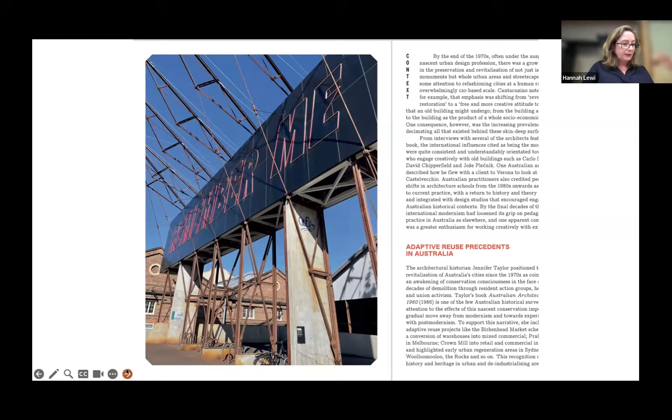And then from our discussions and interviews with the architects, we highlighted quite a lot of common ground in terms of their influences and their design strategies. There was quite a lot of consistency, some debate, but particularly around those practices' own influences, and particularly international influences.

And we asked them all the same questions: who did you look at?

Sorry - probably my son saying, 'What's for dinner?'

They all cite people like Carlo Scarpa, David Chipperfield, Lacaton & Vassal. It's interesting that there's this stable of people we all know about, and that they are having influence and impact in Australia.

Led by our interview data, we grouped our discussion of their current design approaches around challenges such as exploring the fit between form and function as they change function, and how practices go about researching and analysing the historical context they're engaging in, which was a really interesting discussion. NMBW, for example, engage in deep research about the buildings and context they're going to operate within.

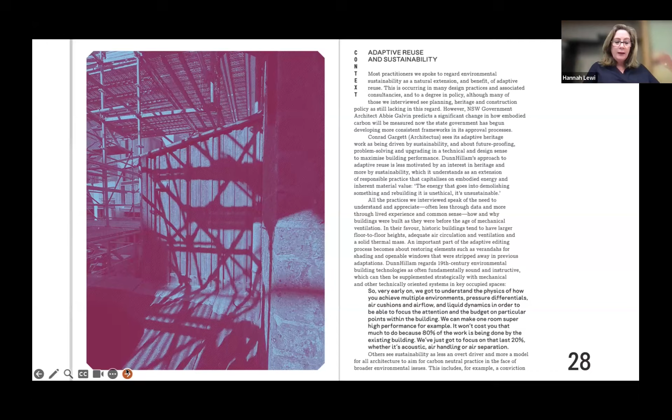How am I going for time? Okay, I'm good, yeah.

So we unpack those things, then shift gear for the second essay. Professor Rob Crawford, a colleague in the faculty, we were very keen to have involved — we'd actually been involved in a failed Australian Research Council bid together.

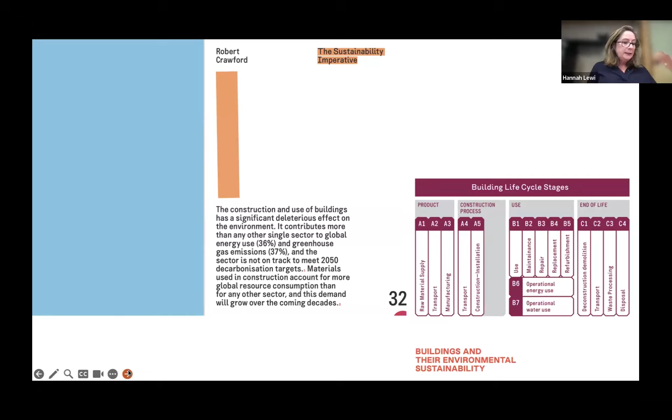We wanted Rob to outline the sustainability imperatives for adaptive reuse and the practical considerations in maximising environmental and embodied energy gains, in a way that's very accessible for students and practitioners — almost as a demonstration for bargaining with your client or stakeholder about the benefits of doing things this way.

He puts together a persuasive set of tools for calculating and demonstrating to stakeholders the environmental value of adaptive reuse. It's complex to calculate exactly at an individual level, but he sets out principles underpinning this presumption, backed by a growing body of research showing there's no sustainable route for the construction sector to reach net zero emissions without drastically curbing new building on greenfield sites, reusing a much greater quantity of materials, and recalibrating reliance on others including concrete, which currently accounts for about 8% of global CO2 emissions.

Many other great books are coming out. One I often refer to is Pedro Gadanho's book, Climax Change, from 2022, which issues a provocative challenge to the architecture profession to lead a new paradigm shift as great as the turn to modernism in the first half of the 20th century.

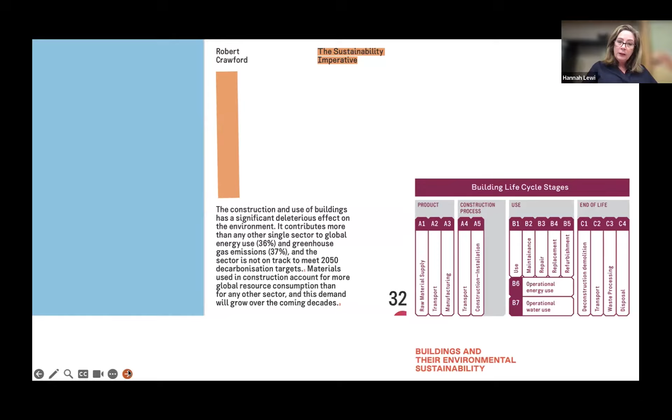I'll whiz through. Sorry, these are just a bit random shots from the book of Rob's essay.

Then we move to the third essay, and I'm not going to talk about this now, but this is around adaptive reuse, particularly in heritage policy, and it unpicks some tensions between conservation and heritage policy in relation to architectural practice of adaptive reuse. But Cameron will talk around some of this next.

The fourth essay, Adapting to New Ways of Working and Living, examines how - and this is already a little bit out of date because we were writing it during the COVID pandemic - these big shifts in the way people are working and living impact decisions around possible adaptive reuse scenarios, such as declining office demands in our cities in Australia as elsewhere in the world.

But it still seems like a relevant conversation. You know, working from home seems to have stuck since COVID. So we were interested in looking at examples, particularly where workplaces have been turned into housing, and the tensions around that.

Some fairly recent examples - there's 180 Water Street in New York from 2017 that's often put forward as a case study in this.

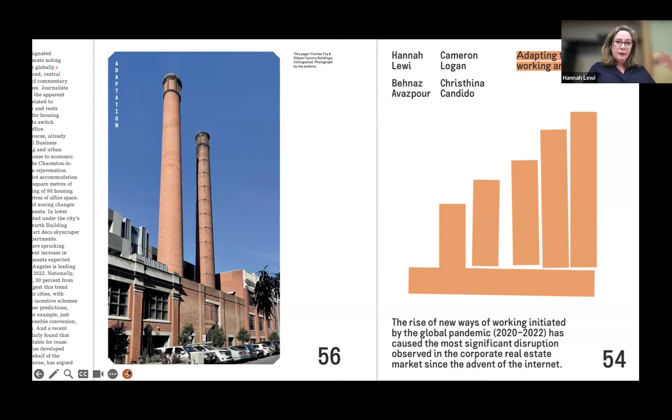And Australian work, we include something like Fender Katsalidis' Alba assisted living apartments, converting office buildings into retirement living in South Melbourne.

We briefly look at issues of how do you calculate the economic value of existing historic building stock and precincts, and the knock-on or proximity effects of this retention of value to neighbouring precincts, including the byproduct of urban gentrification. So a set of wicked problems within that.

Then just briefly, we go into case studies. We've got 23 or so case studies, fairly recent, not all that recent, mostly award-winning. We wanted to get a range of different practices and different types of buildings, and we grouped them into various types in these case study sections.

Those types we group into education, making the civic and cultural realm, urban living and working, interiority projects that are mainly interiors, and then landscapes and infrastructure projects. No individual houses, as we felt that's another discussion.

At the head of each group of case studies, we put forward another short essay where, I guess, Cameron and I, from our historical bent, try to tell the story of this prior to the last 10 years, to start building up towards a different way of talking about the history of Australian architecture through adaptive reuse projects from the 70s, 80s, 90s, and so on.

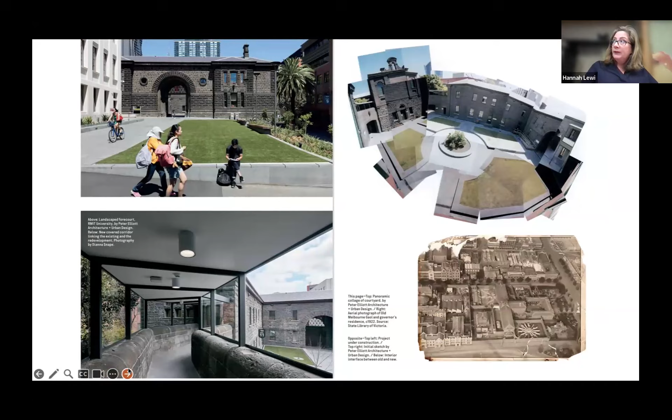I'm going to hand over in a minute, so I'll flash through the case studies but not really say anything about them. These are all education buildings - Peter Elliott's work and NMBW's work at RMIT.

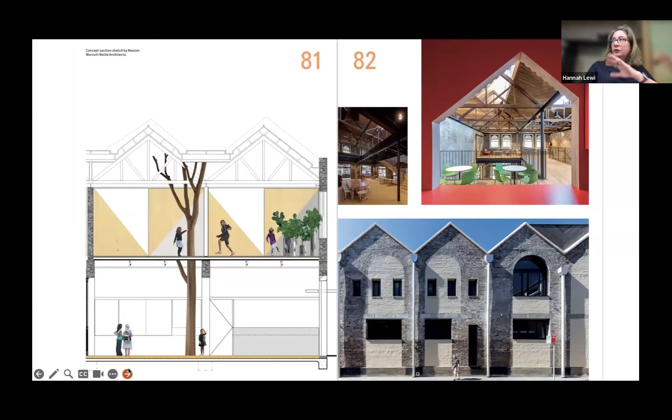Then buildings for community making and cultural sites, of which there's a lot of significant projects from the 1970s and 1980s - major museums, power station adaptations. There's a lot of seminal Australian work in this category.

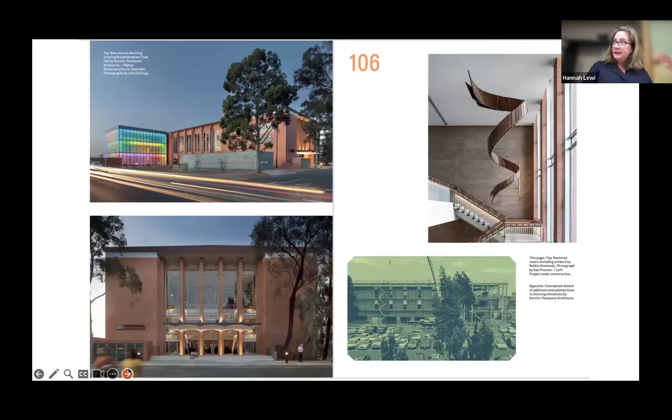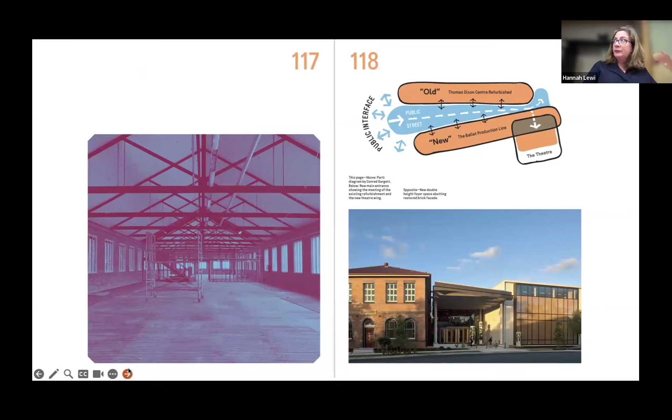So fairly recent ones - Broadmeadows Town Hall. Then some major projects in Sydney by TZG, again really leading practice over many years in this space. In Brisbane, the Brisbane Dance Centre from a shoe factory.

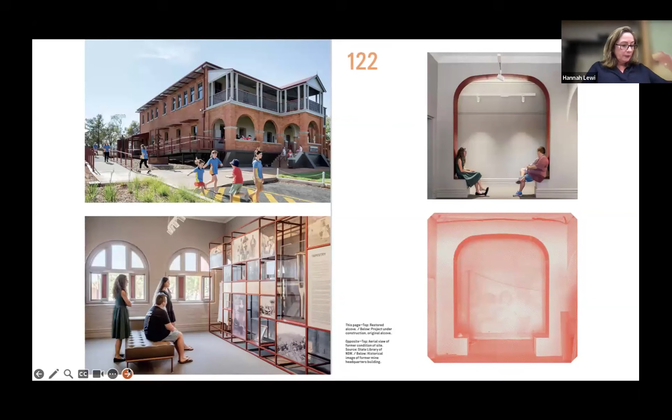And then trying to get some regional work in this, the Great Cobar Museum by Dunn & Hillam.

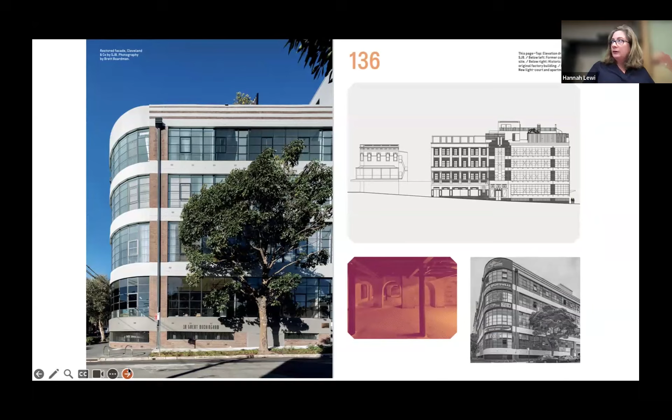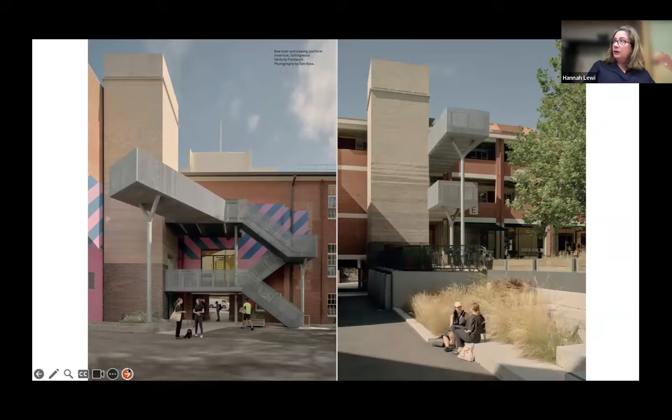I'm just going to whiz through some of these - Collingwood Yards, a major redevelopment project here in Melbourne.

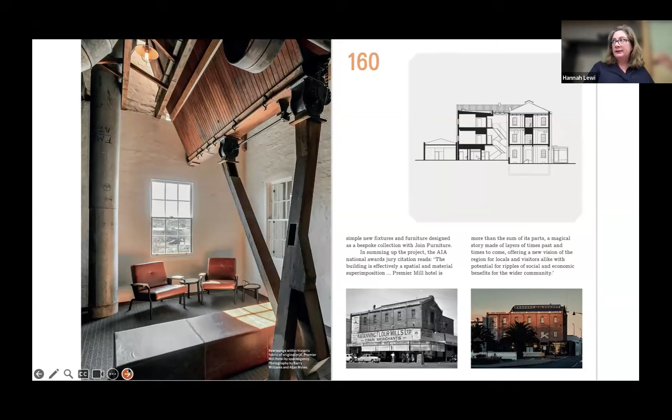And then we look at interior spaces, really difficult to choose case studies, but keen to get some. This is West Australian firm spaceagency, and Michael Patroni and Dimity Walker have done a lot over 20, 30 years in Western Australia in this space.

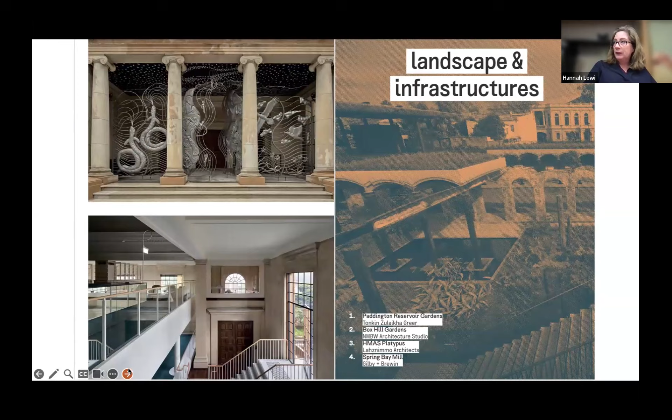And then landscapes and infrastructure - some key projects like the Paddington Reservoir Gardens, but then these small insertions, NMBW's Box Hill Gardens, and other infrastructure reuse projects. And a fantastic project in Tasmania by Gilby + Brewin, the Spring Bay Mill, which won a lot of awards for converting a wood chip mill into an environmental cultural centre.

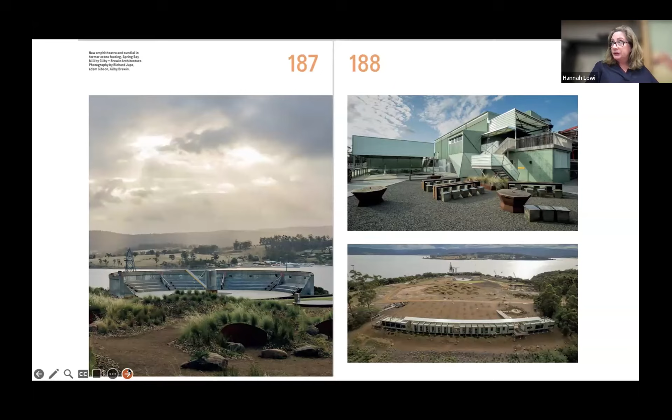And then the last part is a sort of edited essay by Kirsten Thompson from her heritage address from some years ago, really understanding her approach to designing for adaptive reuse. So we were keen to get her voice in there.

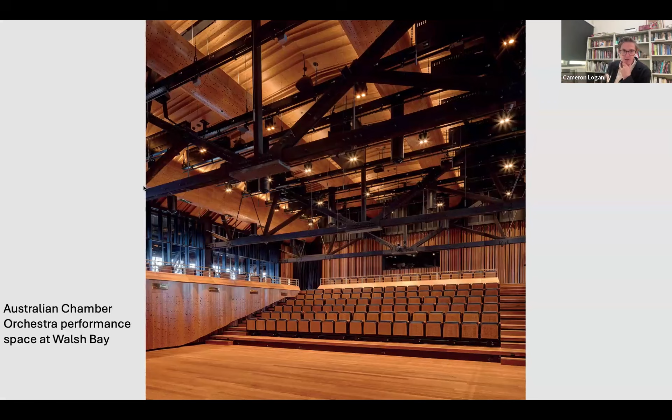So they developed a strategy at that time, and what happened was that TZG undertook a series of insertions into that building, creating two main theatres. This is one of them, the Australian Chamber Orchestra performance space, and also a theatre for the Australian Theatre for Young People, as well as a series of rehearsal spaces.

What they were able to do at the same time was maintain the quality of space that had been strictly conserved through that original conservation action and that strict conservation planning exercise that had been implemented for this particular pier, for Pier 2-3.

So what you have, in a sense, is an irony, or in one respect: the conservation management framework for this area was, at least as it applied to this pier, arguably too strict. It did not enable the renewal and activation of this building, this fantastic timber building, which had a really interesting history, connected very closely with activity during World War II and a whole range of other things.

And the history of the rise and rise of the wool industry in Australia in particular, where millions and millions of tons of wool moved through these things. So there's sort of nationally significant spaces, a huge opportunity in terms of the strategy of the city in terms of renewing cultural assets and so on.

But finally, here they came to a position where they said, no, we're going to undo that old cultural management, that heritage management framework, and we're going to allow the insertion of these new theatre spaces, which they did.

And I think I point this out, or we point this out, in the chapter under heritage policy here: the ironic bit is that I think arguably the project that occurred between 2018 and 2022, led by Tonkin Zulaikha Greer, in particular with the leadership of Peter Tonkin on this project, was probably a better realised project than we might have had in the 1990s phase of renewal.

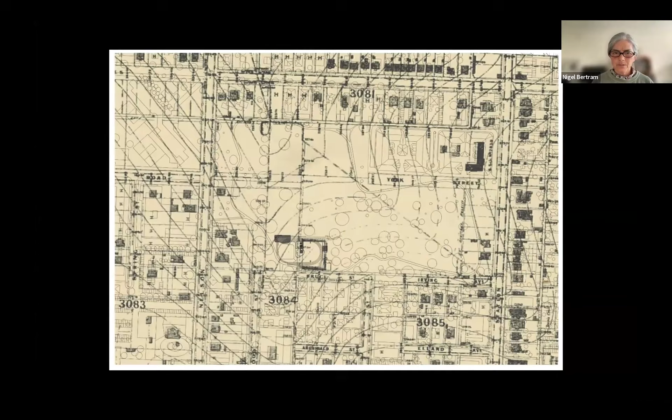Anyway, tennis isn't in anymore, and we were tasked with providing basically amenities and shade structures and some more usable, variable sports areas. What's important is that we took the existing building that was there, that one tennis club, and tried really hard to think through what could be kept in a good way and how to look after all the bricks and reuse them. You can see instantly that we kept a characterful amount of the existing building, and rethought the bricks that were going to be used in terms of being bricks.

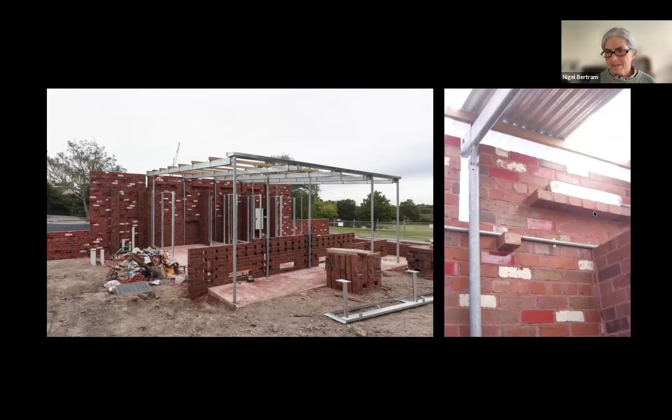So I'll just note that we did manage to look at this colonial bond, where you've got bricks on end. We're looking at the history and technique of construction, and also the materiality of the bricks, which we discovered were actually made in Box Hill, which was really nice to reveal. During construction, we tried really hard to keep the brick-like quality of the bricks. We kept the painted areas, and used brick-like techniques to highlight structure, to hold services, to do partition walls. And here's a light fitting with a brick shade structure.

So that's that project. Now the third one, Geelong Laneways. This is actually quite recent and also designed with Aspect Studios. It's interesting because it goes from a private shop to a public passage. That means the City of Greater Geelong and DELWP, had to actually purchase a private property and turn it into a public passage. So that's a whole lot of interesting things there.

Same problem, same sort of solution of discovering what was there and propping it up, I guess. So here's that King Billy, and just in the beyond, you can see this opened up laneway. This is from the other end where you're looking through, and you can see this is Malop Street, a pretty heavily populated street, and you can go right through. You can get a sense that this is a small street with lots of shops and bars and so on. So it's a very useful connection.

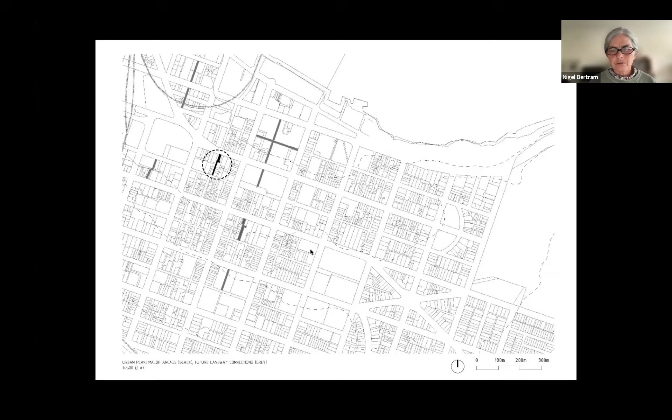This has been going on since 2017. This idea had been going on for a long time to try and really break open Geelong and let people get through from one space to another. It's seen as an urban problem, so it's really nice that Retrofit can work with this urban problem. Here are all the areas that were being studied to try and open up, and at the end there were 10 laneways, and this was the first one to actually happen.

So there's an arcade portion and a laneway portion, and Aspect Studios worked mainly on the laneway portion, and NMBW worked mainly on the arcade portion, but we, of course, interacted.

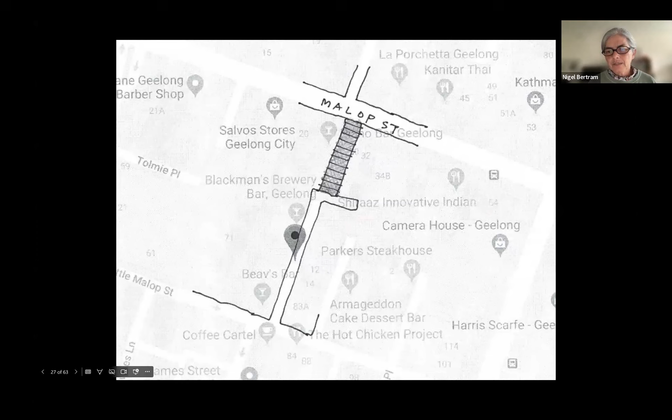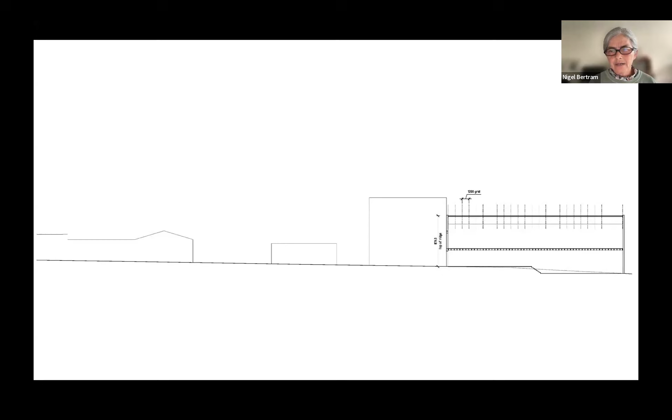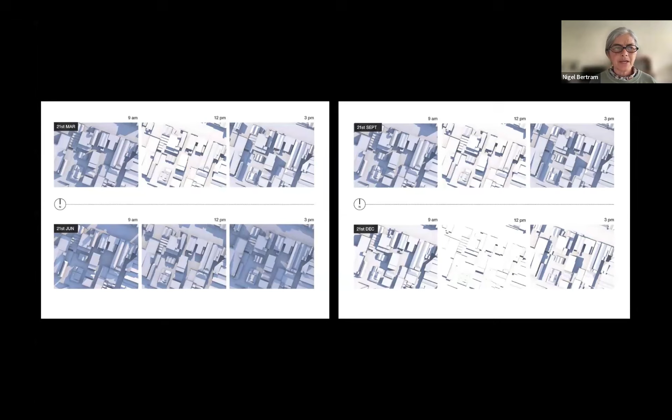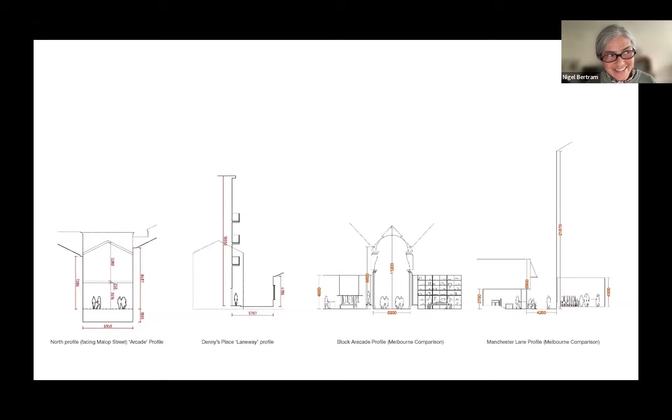This shows you again this kind of historic study, and I'm now going to flick through quite a few slides showing you the detailed study of the materiality of the area and the greenery of the area, and understanding the slope of the land and how that might feed into watering this area, this building, and the laneway. Understanding the sun and how we might be able to get greenery to grow, understanding the character and potential of laneways and arcades in Melbourne as a comparison. This might relate to the RMIT NAS project as well, just quietly.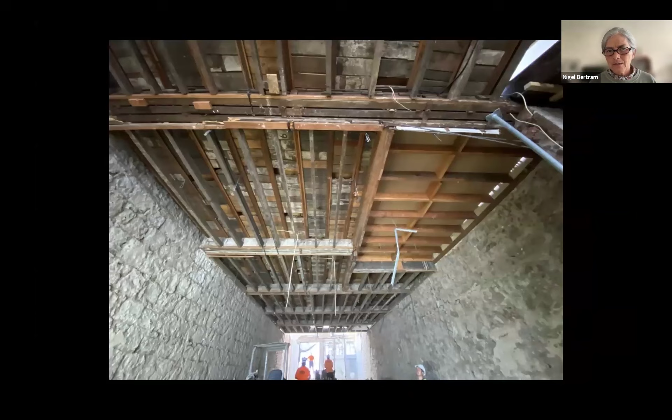So this is the existing structure where you can see it, but before it's demolished. And this is the structure we kept with the cross bracing steel. It's been quite carefully designed to allow, for example, the possibility of a tree to grow, and to allow certain moments of experience as you're walking along.

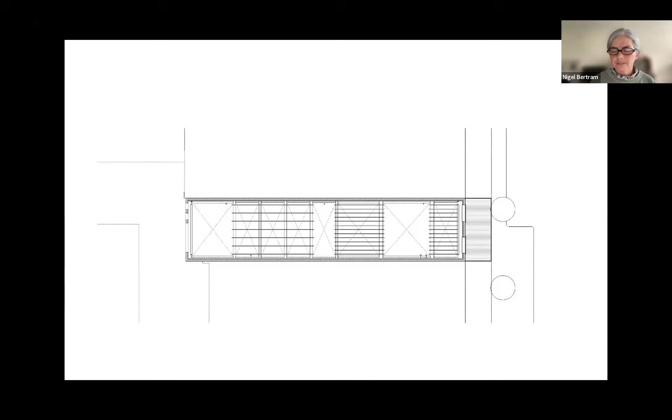And here is the roof bracing, so you can see the kind of effect that happens from this process. The capture of the rainwater was really important, and how it runs along and goes into this green spine of the city. Also, the way that power is revealed is a really important thing to show, and I think it'd be interesting to discuss further whether you reveal it or not.

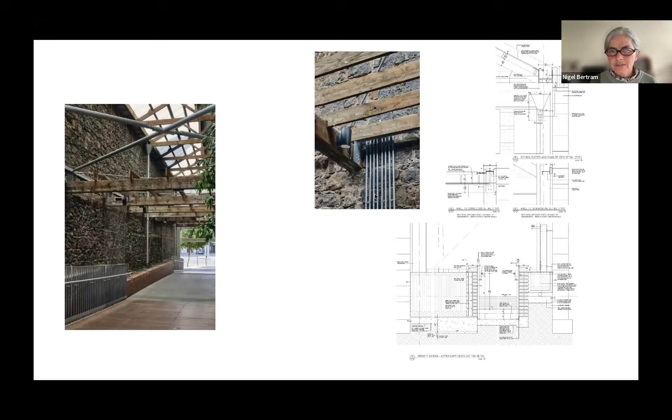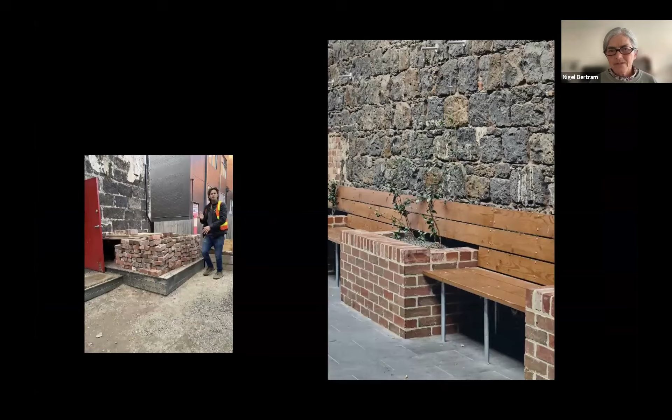I know that's a thing Hannah and Cameron have been talking about. Marika, I think it sounds like you're coming to the end, but we're out of time. That's fantastic, just this flick through the bricks that we've counted. Yeah, that's it, great. Thanks very much, I'll stop sharing.

They're really good examples. I love the fact that we're talking about taking stuff away, and key little moves that actually change the nature of a whole neighborhood. So that's exactly what Retrofit should be doing.

We might quickly talk about some questions, because there's one in there on the costs of maintenance, which is a really good question I'd like to hear a bit about. Hannah, do you have any idea of research available on the cost of maintenance of existing buildings that might actually help contribute to the argument for retrofit?

Yeah, not specifically on costs. I guess from my angle, in terms of theory in architecture at the moment, there's a huge interest in accounting for maintenance and care of places. But I think that's a really good point, others have probably got a better answer to that than I have. It's just part of that whole financial equation, isn't it? Yeah, we're still in early days of retrofit and understanding the value equation around money, carbon, and social impact and usefulness.